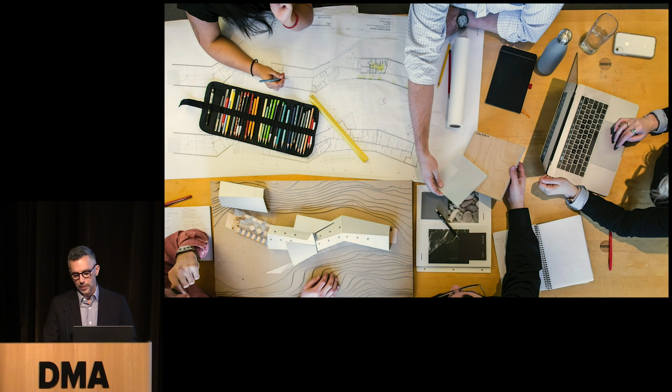So we are one firm in 6 locations, and we work globally, and we believe and thrive on the idea of collaboration. This is a very typical Bohlin Cywinski Jackson meeting - there might be someone sketching on printed drawings, there might be a three-dimensional physical model, we might be looking at materials, there's someone on the computer, and many, many more things. But we thrive on that aspect of being together and working through projects and the design process together.

Our offices are structured in very similar ways in that they are in open, loft-like spaces. We don't have private offices, and they are purposefully very democratic in the way we organize our desks and the size of the desk, all those things. We think that encourages collaboration and accessibility.

If there was a silver lining that came out of the pandemic for us and for our firm, it was that it enabled us to break out of these regional silos we'd been in as six offices, and come together as one firm, because everyone was connecting virtually in exactly the same way. It allowed us to have all-hands meetings for the very first time, and to see everyone's face together for the first time. That prompted things like marketing and staffing across the entire firm, and it brought us all together in a very different way than previous attempts had.

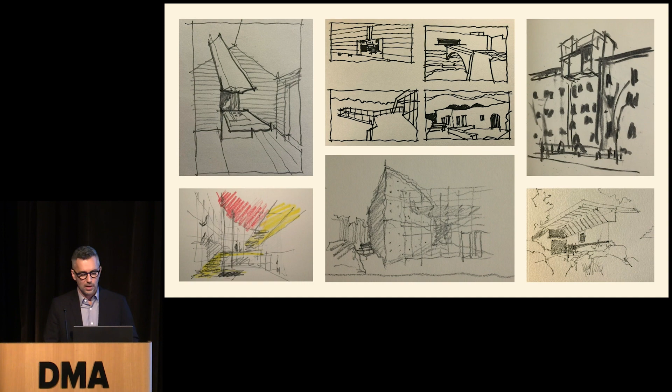We also made a number of interesting discoveries. For many years, we had a sketch club in the practice. We live in a land of Revit — our drawings are done in Revit — and we'd had this notion of exercising different parts of your brain, which many of the senior architects in our practice were interested in. That continued during the pandemic in an even more extraordinary way, where nearly everyone in the firm would participate. Some were timed, some were quite leisurely, but this idea of connecting more viscerally and virtually at the same time was quite interesting to us.

We love a field trip. We love nothing more than getting out in the field, and it's a way of showing younger architects — and some not so young architects now — how what you draw or model or are working on in the office is brought to life on the construction site. That's an important part of our process and our design culture.

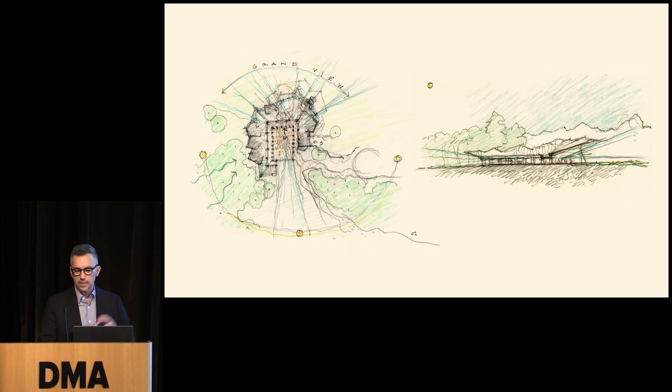There were moments where things clicked for me, and one of those, which Michael mentioned, was the visitor center we did at Grand Teton National Park in Jackson, Wyoming. We started this project in 2001 when I was 30 years old, and it was an extraordinary thing. We were hired to do a new visitor center for a park that gets between 3.5 and 4 million visitors annually, and we learned that we were hired because of our ability to do buildings that were modern but also rustic at the same time. These three things I mentioned earlier — people, places, and material — this was the first time for me that it clicked in a really visceral, specific way.

We had this observation that people visiting Jackson experience a very vast landscape, and we had this idea that when you came to the visitor center, it would be great to have a place that felt calm and scaled to the human, and that it was ordered. So we had the idea of making a courtyard, with the program in the building arrayed around the edges in more jagged geometry that would almost reflect the jagged peaks of the Tetons. The building would sit between a riparian forest and a natural sagebrush meadow, at this middle ground between two landscapes. Once you came into the building, the sense of scale would change, and the roof would tilt up, so the view you had seen driving on the highway for 50 miles would be represented to you.

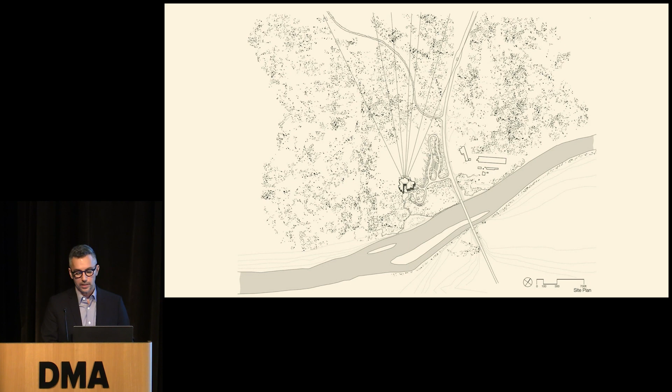It's a sort of incredible site — a few hundred yards from the Snake River at the southern end of the park. The building straddles the line between a dense forest that you're immersed in as you first approach, and there's quite a long walk from the parking space to the building, which challenges some American notions of wanting to park right by the front door. But it was important to us that you decompress when you get out of your vehicle and be immersed in that landscape, and in the sights, sounds, and smell of the forest.

When you come to the building, you're greeted with this courtyard that is very ordered. It feels really good if you're there as a single person or a couple, and it feels good when it's filled with people. The edges are a colonnade that protects from the hot summer sun in Wyoming and also from the heavy snowfall in the winter.

When you step inside, the roof tilts up, and that great view of the Tetons is revealed again. There are some familiar elements that were really important to us. It was important to have a fireplace that acted as a hearth, both a physical and a kind of psychological sense of hearth.

We deliberately wove the exhibits, the interpretive exhibits, throughout this great hall. Rather than having a separate room that was a black box for exhibits, we wanted the experience to be quite seamless and in a way somewhat casual. And the exhibits take the form of uplifts, which is the geologic process that formed the Tetons themselves.

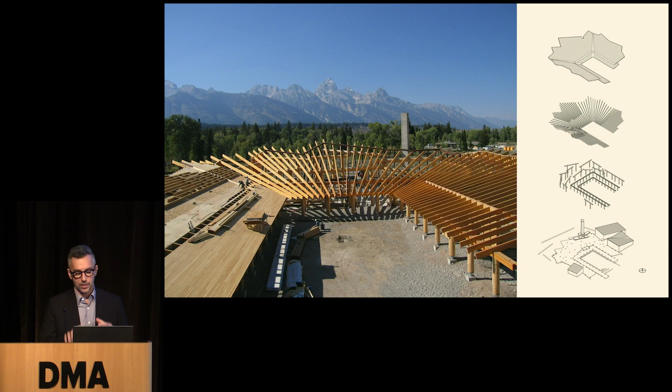Talking a little bit about craft, this building was one of the first that we used, working with a timber fabricator, Spearhead Timber Works, and the entire timber structure was modeled in the computer and fabricated off-site from sustainably grown, sustainably harvested, certified timber, brought to the site in pieces, pre-cut, pre-drilled, and erected in less than one week. So the great richness and tapestry of the building is something we're very proud of.

Leaping forward a few years, I'll share a newer project at Carnegie Mellon University. This is Ansys Hall, which was prompted by the idea of a maker space where students from different engineering disciplines would come together and work with a private company that develops robotics and modeling software.

One of the things we did at the very beginning was make a diagram that did two things. We looked at existing connections between departments that would be using the building, and then we thought about proposed connections that would happen as a result of this new facility. The blue is existing, and the orange are proposed connections we thought might happen, including reaching out into the community to cultural and civic institutions. So it got us thinking of the building as connective tissue.

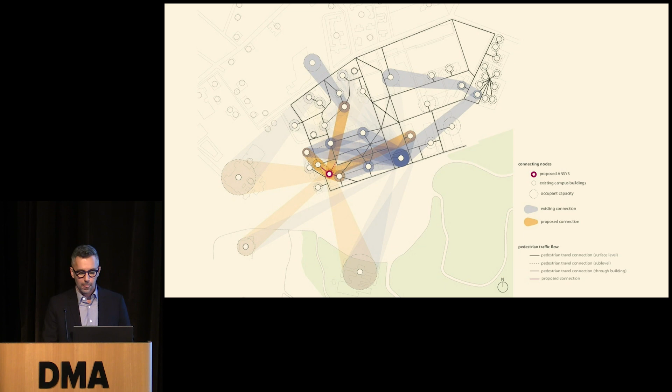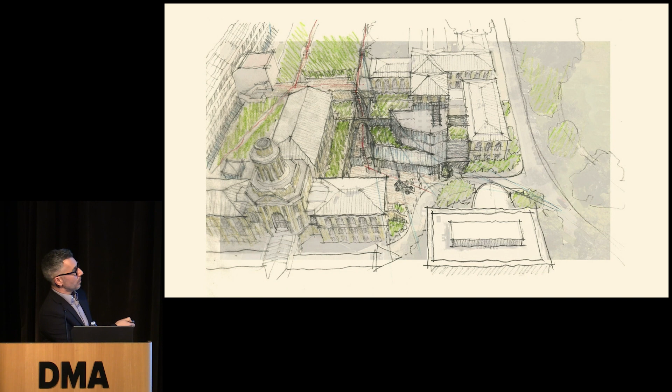This is fairly evident in the first sketch we did for the interview, where you can see us imagining a building that is, in a way, connecting all of these disparate buildings together, as well as campus routes. You see in red here, in particular at the top of the screen, this is campus, kind of the main campus quadrangle, and this path needed to be maintained through the site on campus.

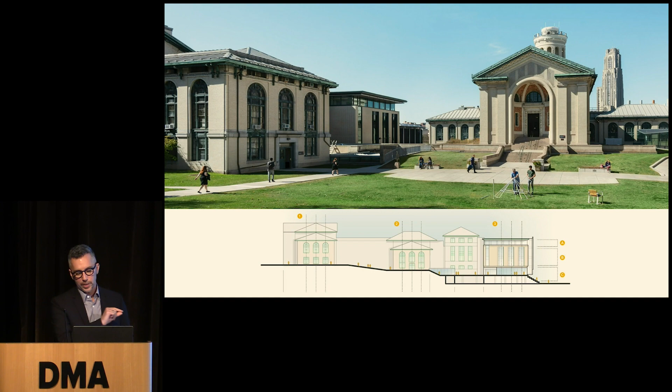There was also a significant grade change between that quadrangle and our site, and we tried to exploit that by making a high bay space at the very bottom of the building. That would be the maker space, and by bringing in the circulation actually through the middle of the building. We did this by establishing a new bridge and walkway that threaded the needle through one of the historic arches that was in place, and then literally sliced through our building.

This did a couple of things: it brought daylight into those spaces, but it also allowed people on campus who were not associated with those programs to see what was happening in the high bay space. That's kind of an exciting thing, to generate interest and enthusiasm for those particular programs.

When you arrive at the end of that sequence, you're in a plaza at the base of the building, and that glass plinth that forms the base of the building is the maker space. There are garage doors that open up, so the space can be used outdoors in nice weather.

The stadium stair allows you to also have classes and kind of a hang-out space outside. The interior of that space was purposefully kept quite raw. The faculty told us they liked the idea that it could be a workshop during the day, and that they could potentially have a cocktail party with donors at night. So all the furniture is on casters, and all of the utilities can get sucked up to the ceiling and then open the space to the outdoors.

The adjacent computer labs in the building and on upper levels were also important to us—it mattered that the students doing fabrication in the shop could visually connect to the computer labs and the software. So there are direct lines of sight down into those spaces.

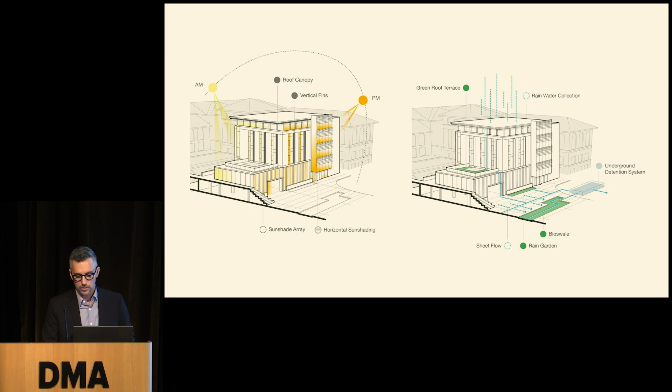One of the things our team is proudest about this building is that it fits so neatly and closely to the historic buildings that surround it. I think one of the successful things is that we utilized the material palette from the historic architecture by Henry Hornbostel on campus, but interpreted it in a fresh way, so it both refers to those buildings and has its own identity. We've done that through a layering of more modern materials that recalls the construction of the historic ones.

At the same time we were working on Ansys Hall, which is a little indicative of the different scales we work at, we were also working on a summer cabin on a glacial lake in British Columbia.

I remember the first time we visited this site with our clients. It sits on a bluff about 100 to 150 feet above the lake surface. We had this feeling—the lake was very still and reflected the mountains, very peaceful, very beautiful—but also a feeling of floating in the trees above the lake. We liked the idea of capturing that somehow in the building.

Our clients asked us to push things a little bit further, so that they would feel as though they were floating in the landscape above the lake.

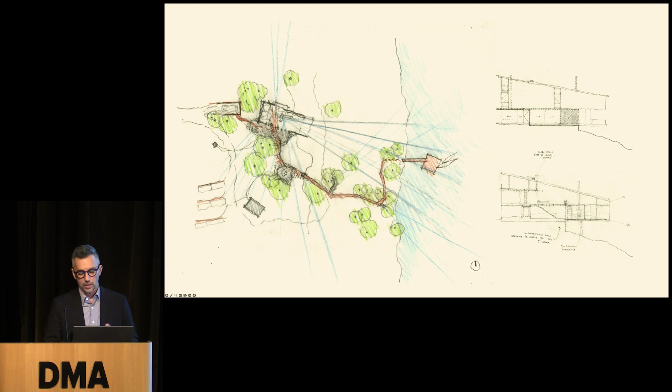We were really thinking about the cabin more as a locus for activity, as the linchpin in the family's daily movement up and down the bluff to the dock, to the lake, and to other activities around the site. We also wanted the building to respond to this incredible topography.

You can see in this section that we're on a very narrow flat strip of land between a mountain and the cliff leading down to the lake. The wedge shape, or sloping roof, evolved from our conversations about wanting to recognize that you could look out to the lake—a more horizontal view—and also up the mountain and into the forest, to have the experience of seeing both.

The cabin itself is quite modest. On the plan, the lowest level has a combined living, kitchen, and dining space, with a small mudroom and pantry. The stair is a saddlebag that sits outside the main volume. The second floor has two bedrooms and one and a half baths to share, and the third level has a loft space for bunks.

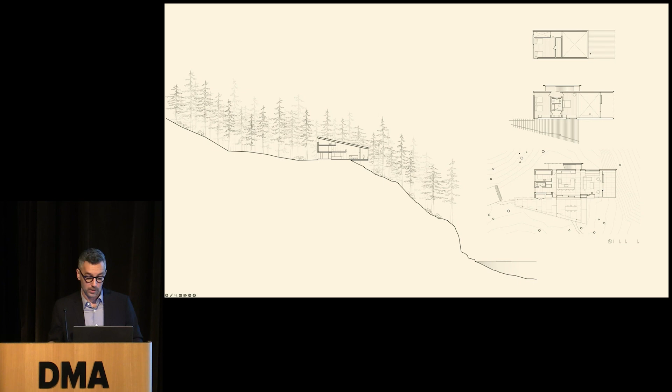The approach side at the road we kept purposefully a little vague and obscure. The clients were concerned about inviting people to explore around the site, so we purposefully kept the elevation rather flat. But the trellis is really the element that draws you towards the front door and also towards the views of the lake, and it angles to the south, which is where the better views happen.

The cabin's primarily used in the summer, so the kitchen space opens directly to the patio, which is where they have their dining tables set up most of the time. And the joists, the structure that supports the loft inside, actually become the elements of the trellis outside.

We used very modest materials here: plywood for the cabinets, stained plywood on the island, and porcelain tile on the floor. Then as you look towards the lake, there's a wall of glass that opens up directly to that view.

We were really inspired, for a long time, by Scandinavian buildings that have a dark exterior that camouflages them into the forest, while the interior is quite warm and has the warmth of the clear finish wood. We like the contrast between the two.

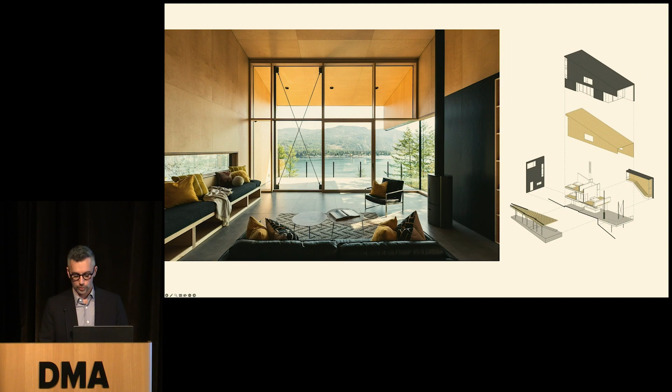We purposefully carved away the corner of the living room to take advantage of those southern views of the lake, so it isn't totally a symmetrical view, as I showed in the previous image. It's become a favorite spot for the family to hang out and catch those long, linear views of the lake.

As I mentioned, the stair sits outside of the main volume and has glass at both ends, so you can see the lake when you're going down and the mountains and forest as you're going up the stair.

And then there are some more intimate moments where we made a cabinet that becomes a window seat for the couple. So sometimes at a very modest scale and with some simple materials, you can make something of great power.

The next project I'm going to share is another makerspace building, but with a very different circumstance. Unlike the alleyway that became the site for the Carnegie Mellon project, Ansys Hall, this is a project at the University of Illinois that has an extraordinarily open and prominent site.

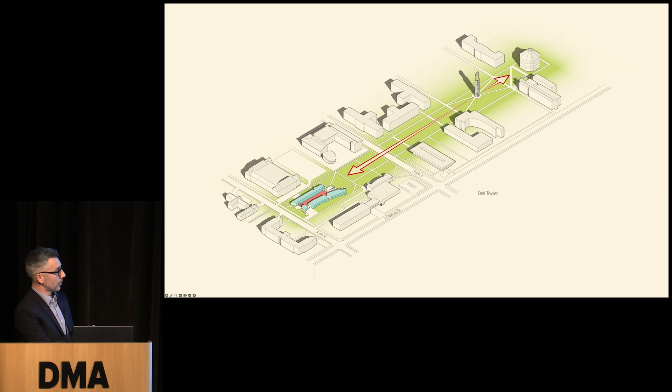It sits at the end of what they call the military axis, at the end of a very long campus quadrangle, with the bell tower at the center, and their campus library is this octagonal building at the upper right-hand part of the image. Our site, at the terminus of that before the more residential neighborhood, occupies this kind of building in the round, or it became a kind of idea of a building in the round. So we had an interesting response to their program.

The master plan originally called for a 4-story building, and we decided that because of the collaborative notion of a makerspace building, it should really be 2 levels, to keep everybody closer together, since getting to 4 floors would begin to segregate activities. So we convinced the university that they should condense to two floors.

And then we split the building into 2 wings, the idea being that you would connect to that quadrangle and to the campus more directly if the center of the building opened up to it.

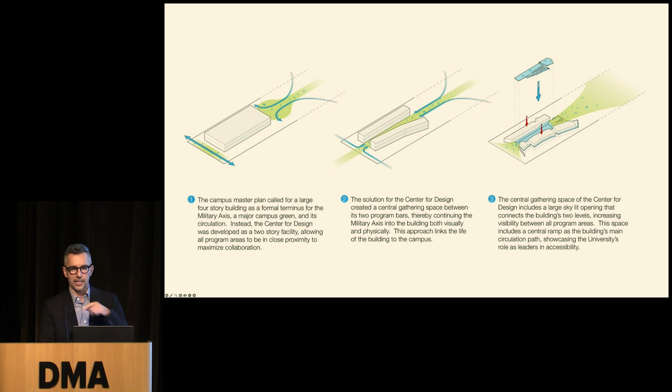The third component is that we and the university decided to explore universal accessibility. They were interested in being a leader, in being at the forefront of that. So every space in the building is accessible through a series of ramps. There isn't a grand stair, but rather a grand ramp that occupies the central atrium, linking all of the spaces together and encompassing gathering spaces for the students.

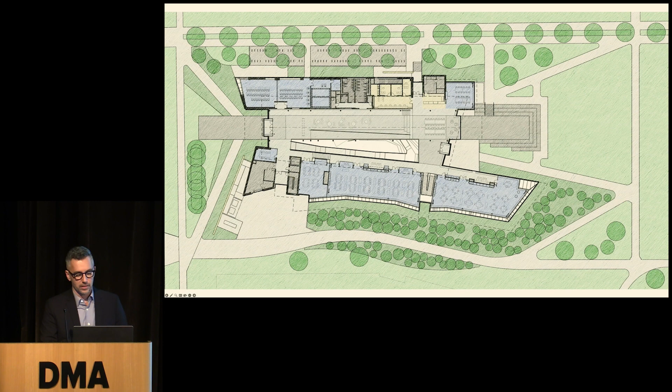So here you see the floor plan. The areas in light blue are the kind of shop spaces, classroom spaces, fabrication zones, and the space in the center that I mentioned before, which winds down to the lower level, is a series of ramps. There's a porch that looks out onto the campus green.

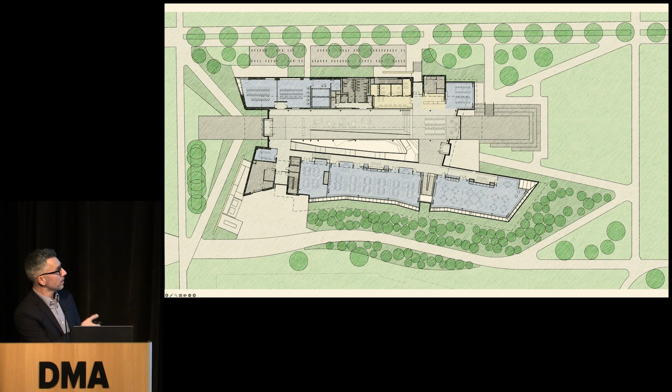And then the lower level, there is an area at the base of the ramp that becomes a gathering space and another classroom, and then again a series of shop spaces.

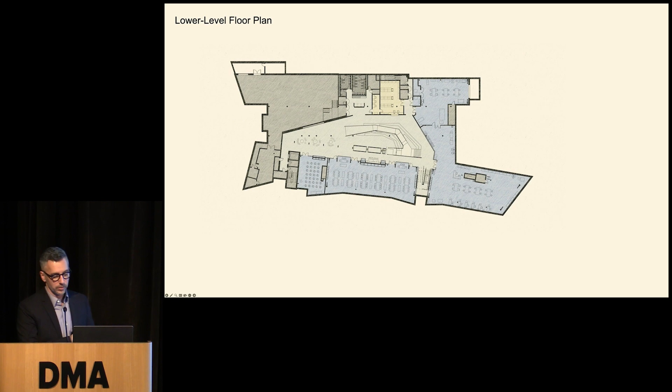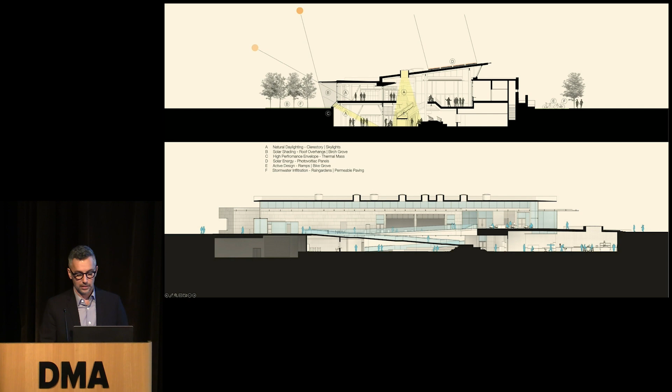And then you can see that center space as the ramps wind down through the building and how it's used by the students, as well as offering these sideways glimpses into the classroom spaces that are on both sides.

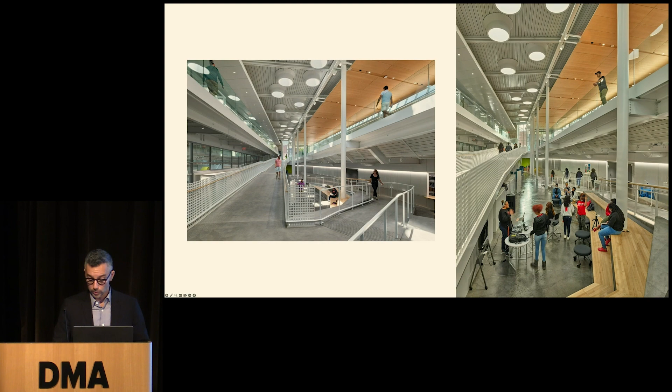As I mentioned before, one of the floors is submerged below grade, and so there's this angled glass skirt around the perimeter that really floods those lower levels with daylight.

So, bouncing again to a residential project, this was the first time I'd ever met anyone from Tasmania. Our clients are from Tasmania, and it's not Australia—they're very clear about that. This is located in Canmore, Alberta, which is quite close to Banff.

It's about an hour's drive west from Calgary. Our clients were drawn to this particular place because they are mountaineers, mountain climbers, and hiking enthusiasts, and they really liked the idea that they could be so close to the mountains and actually see them from their property.

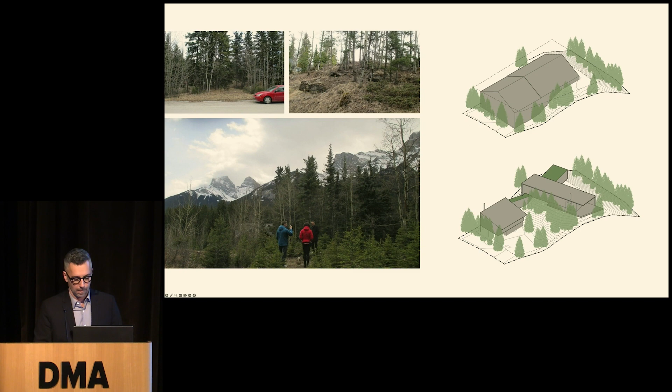So the plan evolved in an interesting way. There is a carport and a garage—he likes a carport, she likes a garage, so they're both happy. The entry is here at grade, and there's a stair and a mudroom.

So the stair takes you up to the second level, which is where there are two guest bedrooms, one of which they use as an office or a study. And then a bridge that takes you to a second stair that goes up to the main living level, which is where their bedroom is, and then kitchen, dining, and living.

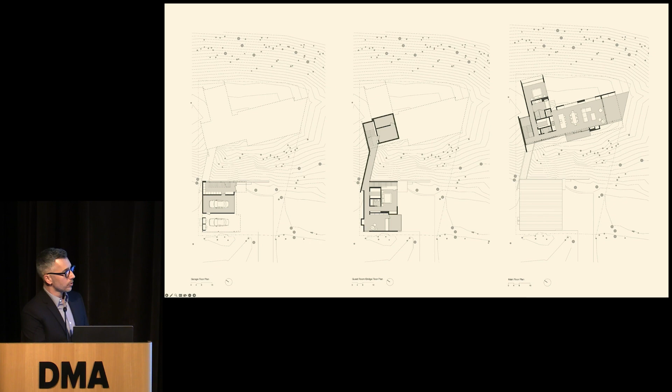And the angles are quite deliberate—they are aimed towards particular views of their favorite peaks. And that's the section.

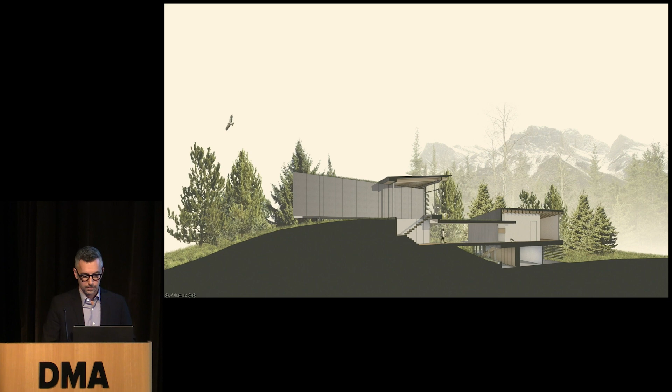So looking at the finished house, you can see we retained the veil of trees at the street. There's a very narrow driveway that takes you into a space where you can begin to see the house as it terraces up the hill.

The bridge, as you turn and head towards the upper volume, has this moment where you sense the forest and the space between the 2 volumes, and we really like that you get that moment of connecting with the outdoors and the exterior.

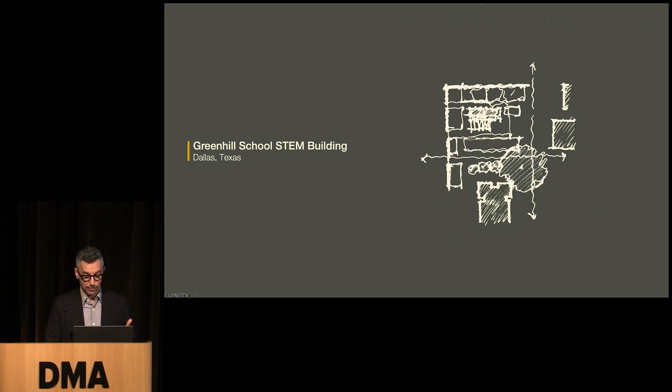We are very fortunate to have a project happening in your city right now. As Michael mentioned, we were selected to do a new building at the Greenhill School. And I had the great opportunity to visit it today, so I'm going to share some very recent construction photos with you too.

One of the things that was really interesting to us was this beautiful campus, some of which is designed by O'Neil Ford, that had these cloistered, outdoor walkways and courtyards that really allowed a kind of in-between climate between the conditioned interior spaces and the often warm and humid exteriors. And then this interest in natural materials and bringing daylight into classroom spaces was a kind of pattern or precedent on the campus.

So our building anchors a kind of important corner on the campus and in quite close proximity to 2 existing buildings. But it has a very straightforward and a little deceptive plan.

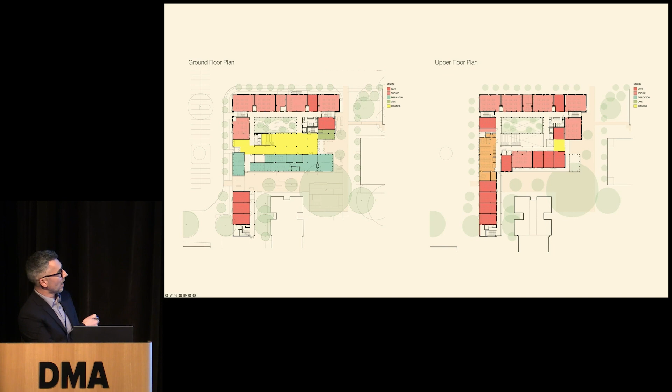So the red spaces are math and science, and they kind of occur on the perimeter on both floors. And then there is a kind of fabrication zone of shop spaces and maker spaces in this building. And then there's a great commons that surrounds a courtyard that's internal.

And then there's a great outdoor space here, and there's a 100-year oak, beautiful heritage oak tree here that we're retaining that was a kind of important part of the overall composition of the building. And then, as you can see, the building connects quite closely to some existing classroom buildings on campus.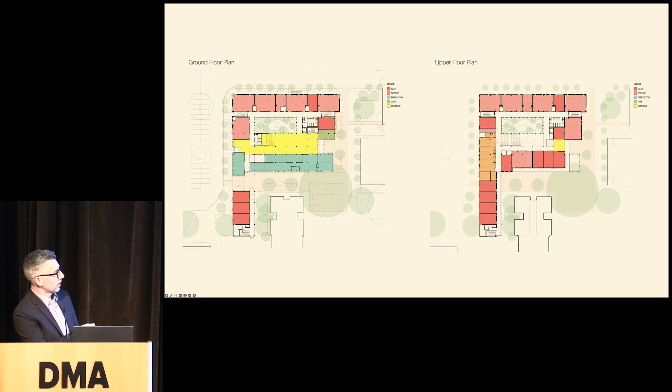But it was really the section that started to get us kind of excited. We and the school explored the idea of making a very sustainable building, and were interested in using mass timber and cross-laminated timber, or CLT.

And so it really became a kind of exercise in section of how to bring light into these spaces while also keeping them comfortable for the students and the faculty.

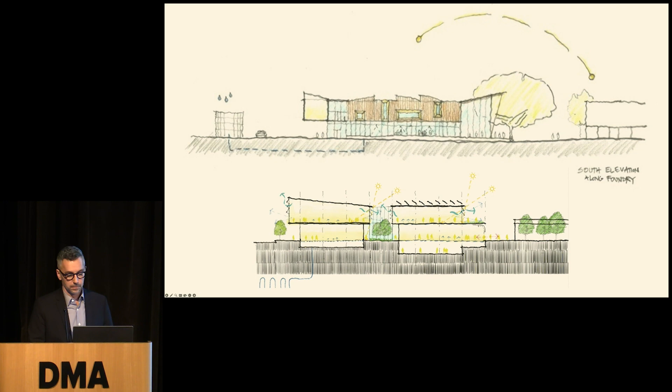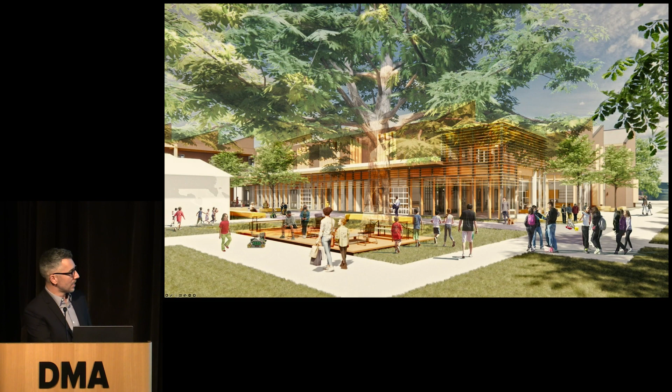So I'm going to share with you some of the renderings for the project. This is looking past and through the 100-year oak into this kind of commons alongside the makerspace.

The building has two natures. It has kind of a hard outer shell that is brick. We're using a brick that is used throughout their campus.

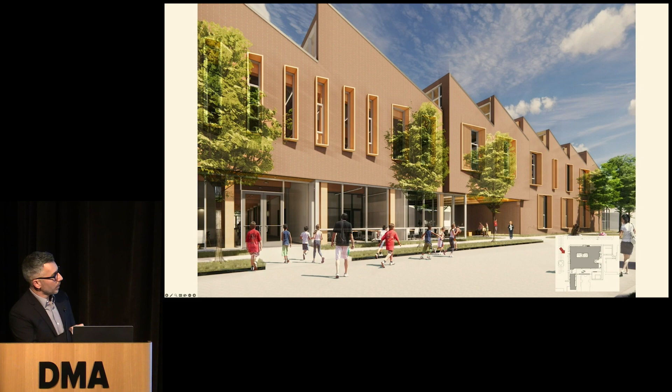And you can see the sawtooth shapes are bringing in north light into all the upper level classrooms. And these shrouds on the windows are helping to shade the glazing, and they're different depending on the orientation of the building.

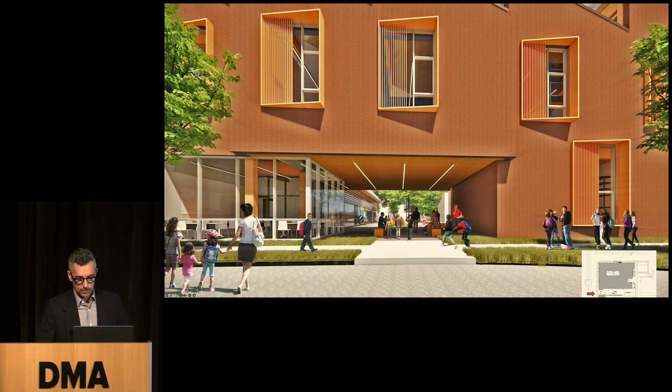That's looking back through the portal towards the heritage oak.

And then this is looking into what we think of as the main entrance, although the building has many entrances, into that kind of commons space. There's a big seating stair for collaboration. It has skylights, and you're adjacent to this beautiful internal courtyard.

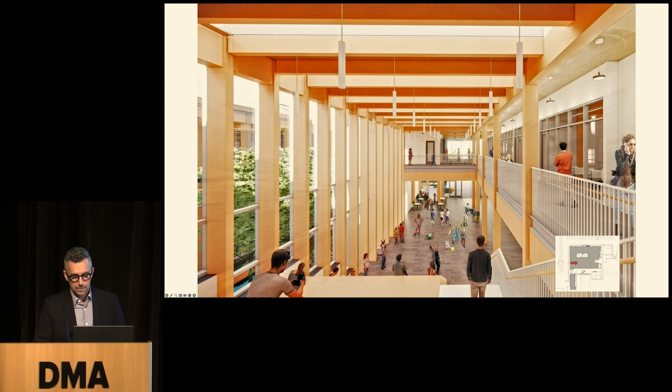So these are some very recent photos taken earlier today of the building under construction. They're hoping to be done later this fall.

But what a wonderful thing to use mass timber and CLT as a way of reducing the building's carbon footprint. And exposing all of that on the interior, we think also provides a great learning opportunity, teaching opportunity for the next generation of people.

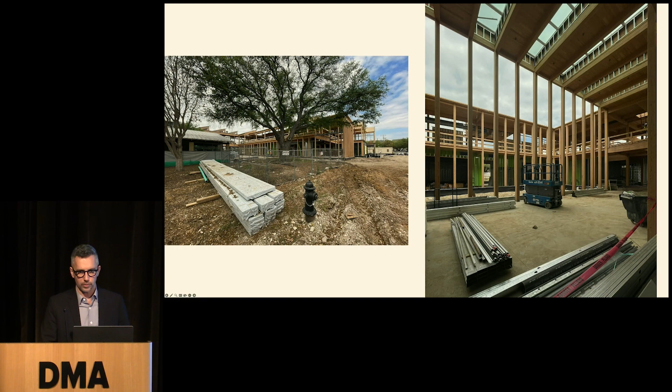Henry Island, which is one of the islands that does not have any ferry service. So to get there, you either take a boat or a plane to the main island, and then you take a charter across, being very careful of the tides.

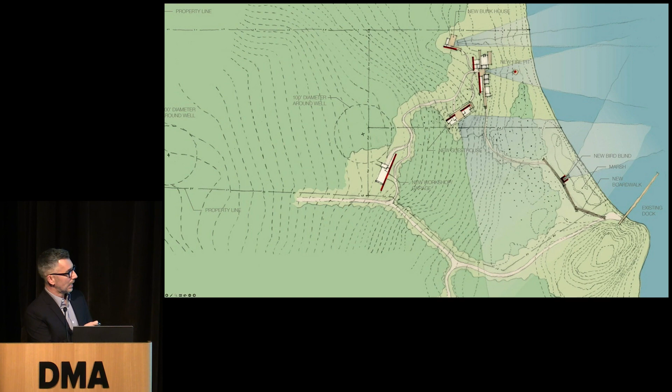So there are no cars on the island, but they have a series of ATVs and lots of gear, canoes, kayaks, paddleboards, etc. So they wanted a space where they could store those. And then they wanted to do a guest house with two guest suites, and a bunkhouse, which eventually turned into more of a little activities and hangout pavilion that we call the Game Shack.

The idea was that we would take the weathering steel material palette from the main residence and think of that as a way of linking all of those buildings together. We sort of thought of it as a wagon train of sorts. And I'm going to share with you today the guest house.

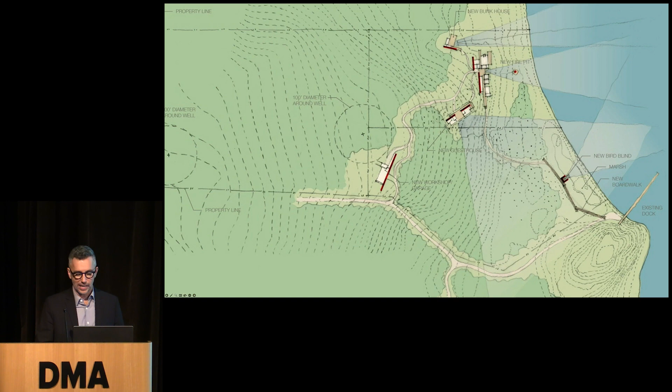When you come out of the forest, you arrive at the guest house, and we were really inspired by the breezeway on the main residence, but we wondered if we could take it even a step further. So we had this idea that you could make a living room space or a hangout space between the two bedroom suites, and it could be totally open, or it could have walls of insect screen or walls of glass that pocket away. So we tried to make a space that felt like a porch but could be enclosed if they wanted it to.

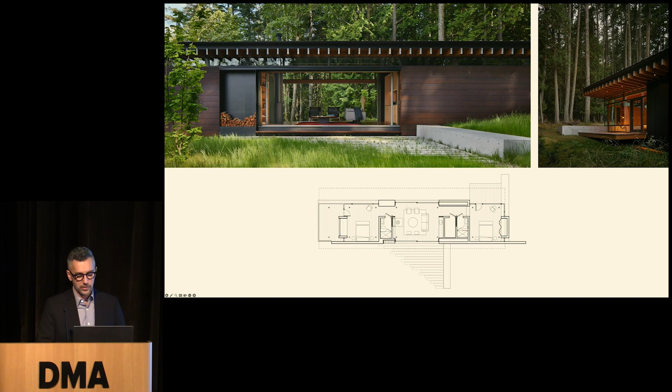One of the things that I enjoy about the building is that it sits on a slope. So the bedrooms have very different natures. One of them nestles into the grade, and the other one floats above the grade. So the building kind of emerges from the landscape in that way. On the image on the right, you can see the upper bedroom that tucks into the landscape.

The structure is slender steel pipe columns with back-to-back channels that support a raft of wood. And then the windows and doors and cabinets and walls are all arrayed below that.

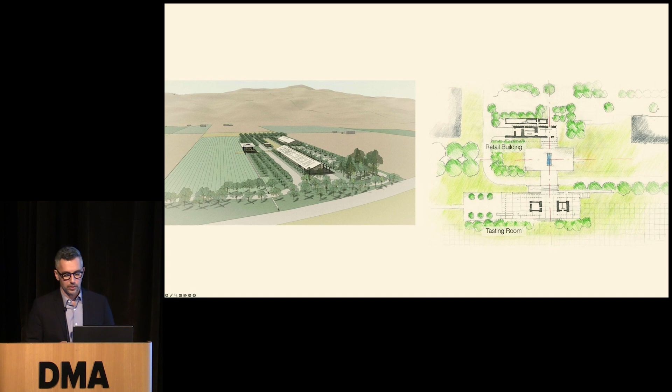I'll take you on this experience through the site. You come to a building made of ground face concrete block, exposed wood beams, and a very tough standing seam metal exterior—very modestly scaled, very intimate. That's what you're greeted with.

There's an espresso bar for those who need a little pick-me-up before the wine tasting experience, and some restrooms. We thought about how the light would come in, but it was always thought of as a protected, shaded place.

There's also a temperature-controlled space where they sell their wine, which you can stop at either on your way in or on your way out to purchase the wine you've tasted.

But it's really as you leave this building and approach the tasting room that you begin to see something that feels quite extraordinary.

The tasting room has three zones. There's a space in the center, a more casual experience where you can walk in without an appointment and hang out and taste wine. Then at each end there are rooms for private tastings that can accommodate large groups or events. The idea is that both of those things could happen at the same time.